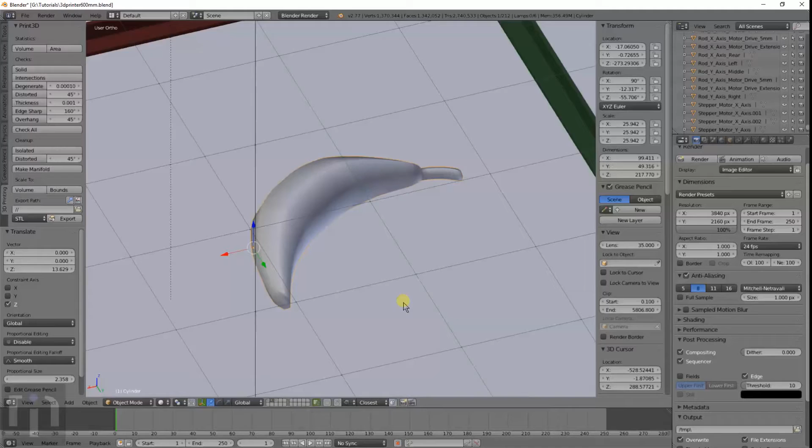Sometimes you just gotta have a banana for scale.

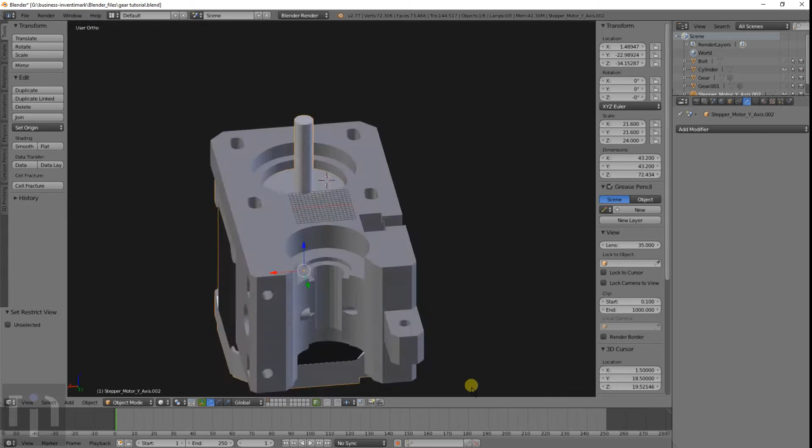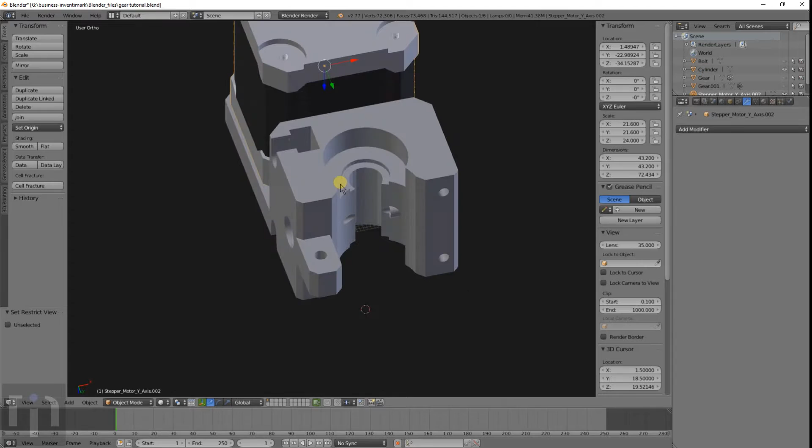Right here I have an extruder that I use. It's the Cyborg extruder. I got it off of Thingiverse. I'll have the link to that in the description of the video. Anyway, this is the one that I use. It works pretty good. The filament goes through here, and it's got a spindle here for the hobbed bolt. I just use a 5/16 bolt that I have, because I couldn't find any metric bolts around here, so I used that, but it works just the same. Anyway, I'll show you how you can make your own custom gears to fit whatever you need, depending on how strong you want the motor to be compared to the output of the filament extrusion. So anyway, let's get started here.

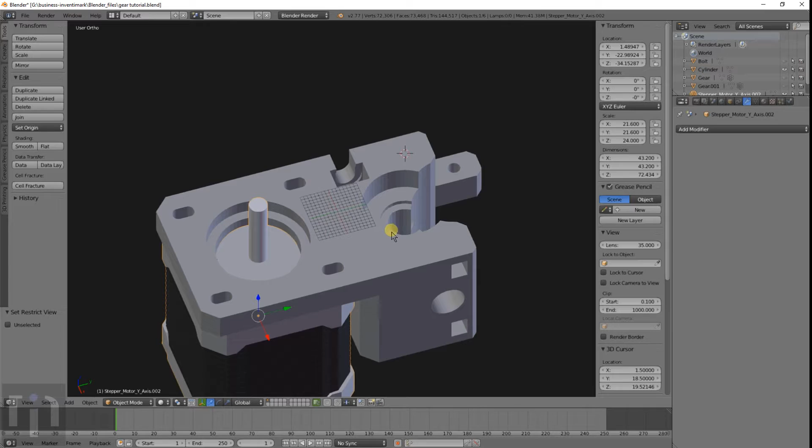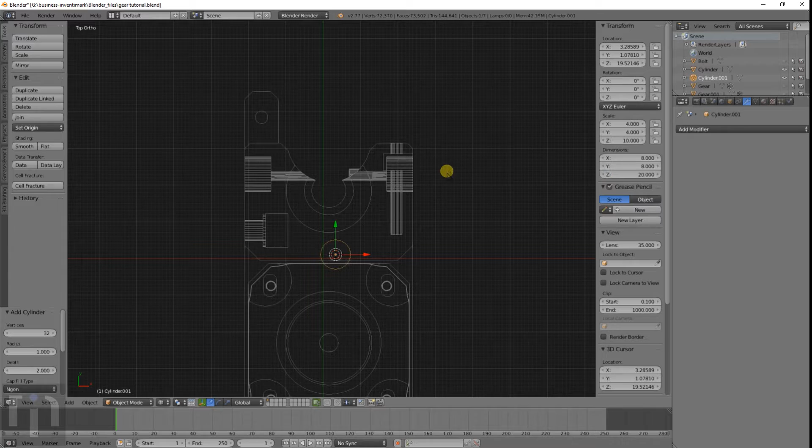So what I like to do is go into top-down view. I already have the motor there, and it's centered on one spot. I already have it centered over there, but I'll need to recenter it here. The first thing I like to do is basically create the bolt that I need. It's going to be 8 by 8. It really doesn't matter how long it is at this point, because we're not really making the bolt, we're just making a simulation of it. So I kind of put it where I think the center is.

Then I duplicate that and just make a bigger one that goes around, that fits up, and you got to kind of match it up to this other thing here. Kind of line that up as best as you can. And get it lined up there, and then you Shift S, cursor to selected, and then select the other one. Selection to cursor, that gets it right in the middle. Turn on my screencast keys, keep forgetting to do that. Okay, so now we have the center point for both of the gears that we want to make.

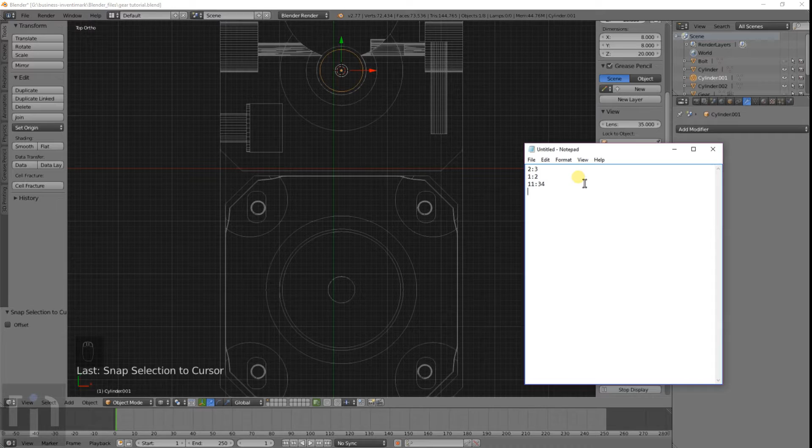And for the gears, what I like to do is pick a ratio that you want the gears to be. You could have it 2 to 3, 1 to 2, 11 to 34, or 4 to 34, whatever you want them to be. And when you have the gears, the best way to do this I found is: whatever your gear ratio that you want it to be, you add the gears together. So let's make this about a 4 to 9 ratio. So we're going to have a 4 to 9 ratio. So one of them is going to turn 4 times, the other one will turn 9 times, so it equals the same. So those added together equal 13.

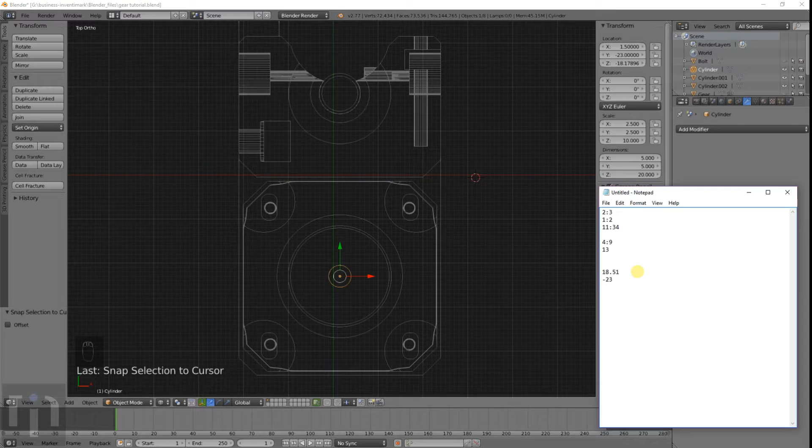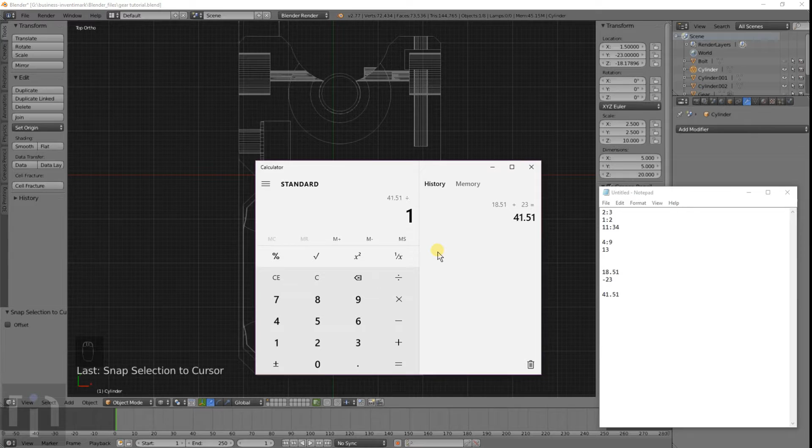So what we need to do is measure this distance from here to here, and whatever that distance is, we can get the information we need from that to make the gears. So here up on top, let's go back - this one is located at... we're on the y-axis, so over here on y we're at 18.51, and this one is located at negative 23. And there we go, negative 23. Let's get the calculator out. 18.51 plus 23 - so the distance between them is 41.51. So to calculate what we need, we divide that by the 13 we got for the ratio. So the distance from here to here divided by the ratio we want, which is 13, equals 3.19. And that's the key number we want to remember to use when we're making this.

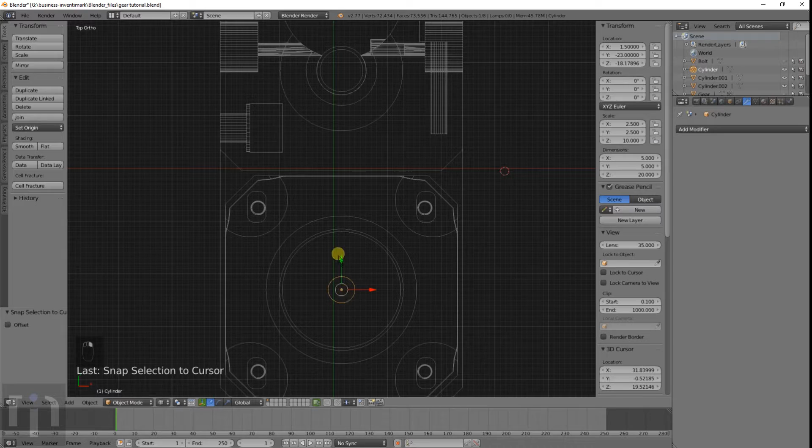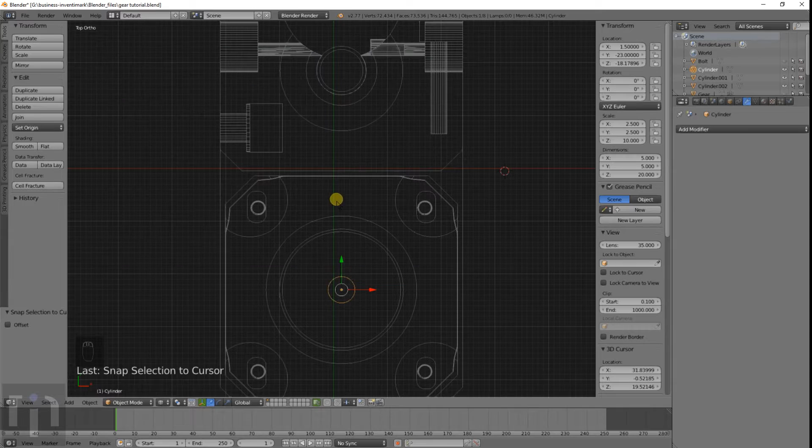So the 4 gear is going to be the smaller one, so that's the one we want to put here. The cursor is selected here. And if you don't have the gear option here, you need to go into Settings, User Preferences, Add Mesh, and there's a couple of different options. The Add Mesh Extra Objects, and Bolt Factory is good too, you can use that. So you add both of those, hit Save Settings, go ahead and close that, and you push Shift A. And you have the option of gears down here, and you go to Gear. Oh, undo that - gotta move the cursor over there first. So, add gear.

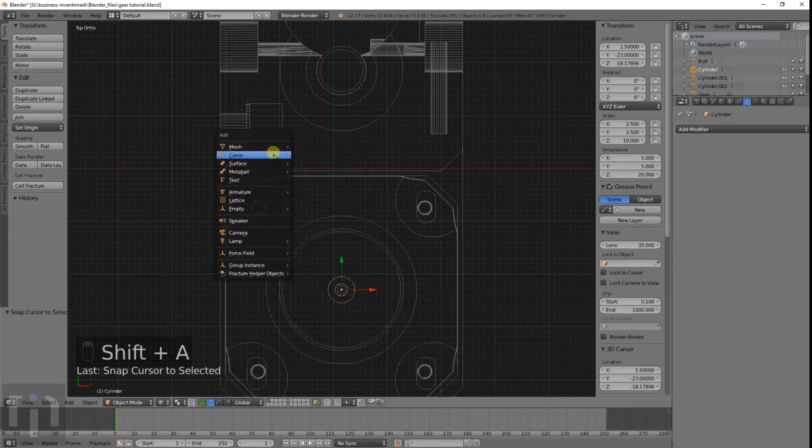And then we have the options box down here for the properties. Number of teeth, we'll look at that in a little bit. But for the radius is what we want.

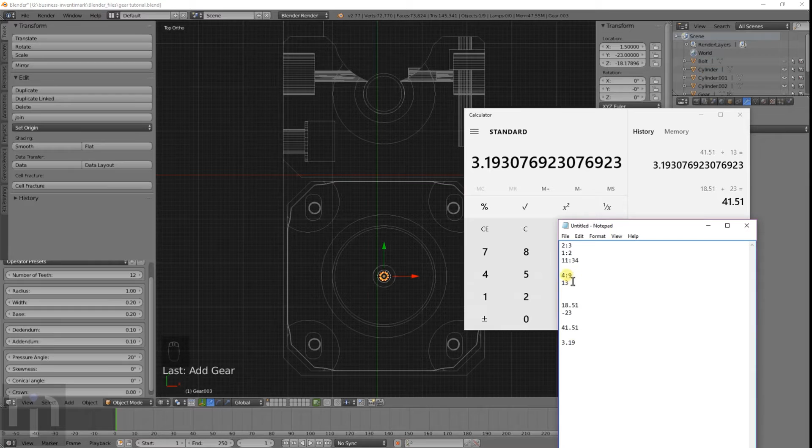So we go back to what we had before. We want to take the 4, multiply it by that 3.19. So we take 4 times 3.19, gives us 12.76. That's going to be the radius of this first gear.

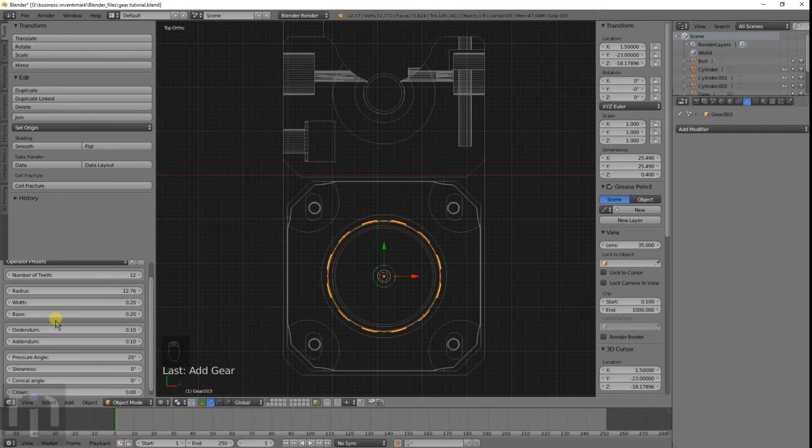And so if you look, well, actually, can't see the gear. It's inside of the motor there. I'll pull it back up when we get this done. But we can see it from here.

And the base is basically just this. Just want to make it smaller than the outside of the gear.

And the dedendum, this is the inside of the gear where the teeth are, how much that goes in. I usually just go to about 1, typically works for most things.

And let's try 1.25. I usually try to get those to match the same always.

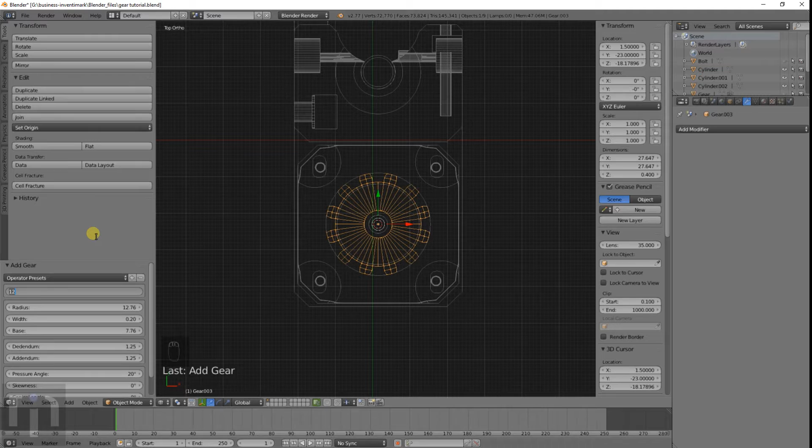And as far as number of teeth go, that all depends on how fine you want to have the teeth. I usually do what looks good. There's no real calculation that I have for that.

Let's see, 20 teeth. If it's that big around, let's try 16. That'd probably be good. So we got 16 teeth there.

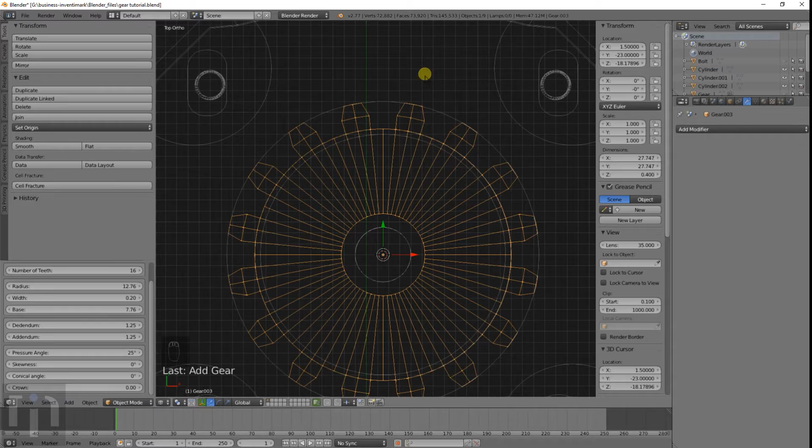And you can actually change the pressure angle and change the outside of the tooth there. But that all depends on what the pitch of the teeth you have, basically.

And so I think we're done with that gear. Oh wait, no we're not. We need to change the width of it.

And usually a good width is probably about 6 millimeters. So that gives you kind of an idea of how big it is. It's 6 millimeters by that big around.

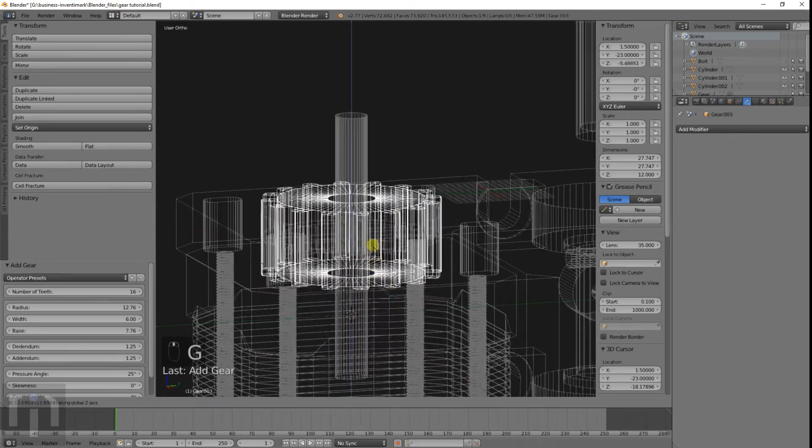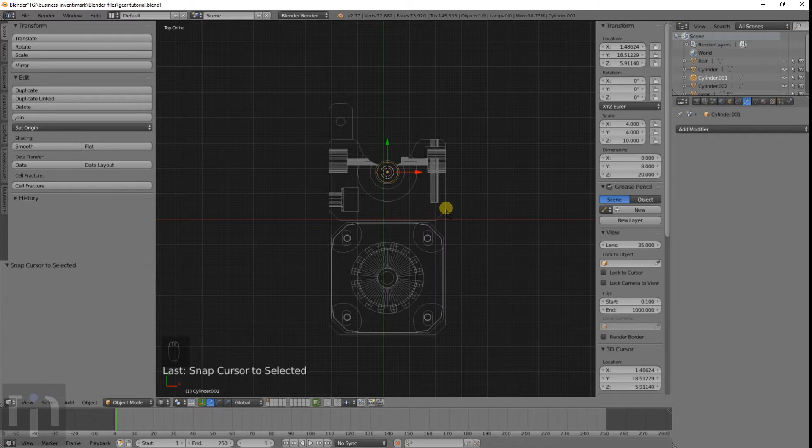Because whenever you move the gear, just like with anything else, it disappears. So let's go ahead and move the cursor to that, and add the other gear.

And so it brings back the same exact size gear that you were just working on. So you can actually use that if you want to change things pretty quick, because it'll keep all the settings that you have here.

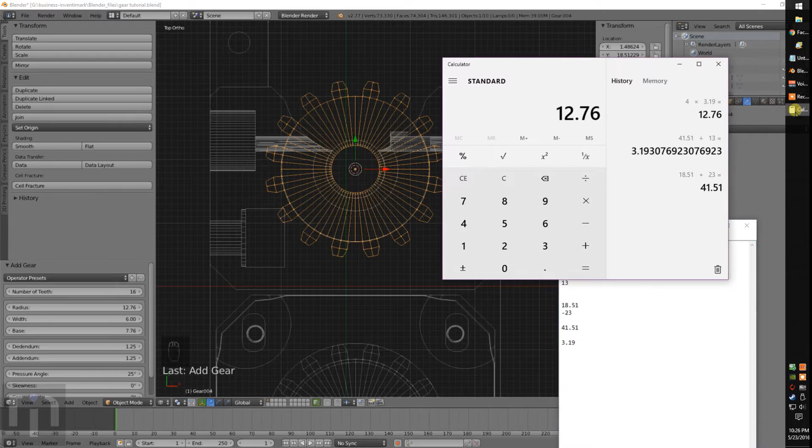And so we got to take 3.19 times 9 is 28.71. So the radius is 28.71. Yeah, that's right.

And so the gear comes out to the right size. But for the number of teeth, we want to kind of have this be a multiple. So 16 divided by 4, that's what this ratio was, would be 4.

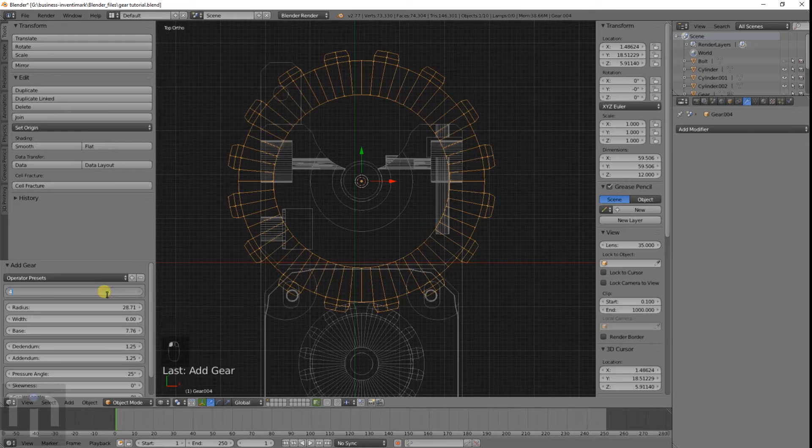So you want to have 4 times 9. So you can actually just do the math in here, which would be 36 teeth. And that makes the teeth line up exactly.

The ratio goes into the same way, so whatever your teeth you have on the first one that you do, the same ratio applies to the other one. So it was basically 4 times 4 is 16, and 4 times 9 is 36. So then we get the correct gear ratio there.

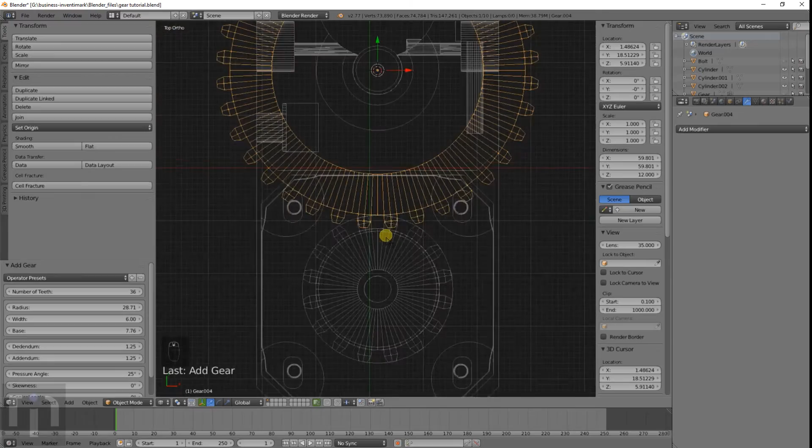I can change the base down a little bit. And so it looks like they line up pretty good here.

And we really don't need to do anything else to the gear. Rotate Z just to double check that they line up good. So it looks like they mesh together well. And the right number of teeth are displaying.

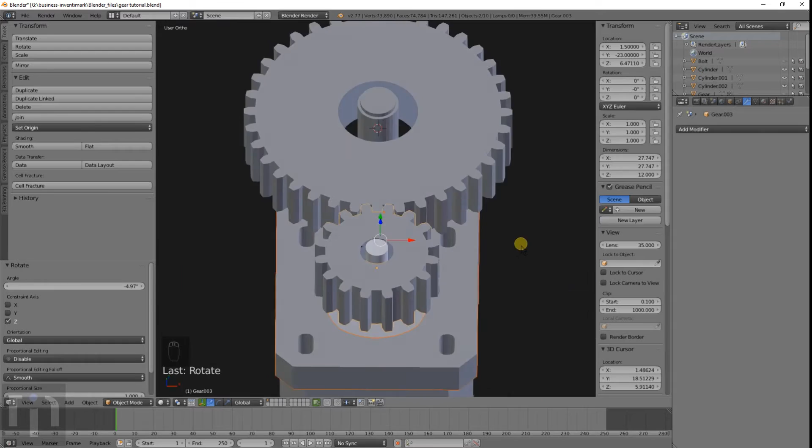That's pretty much all you really need for making the gears. To modify them to work properly, I like to go into edit mode. I'll click around the ring here, which will let me.

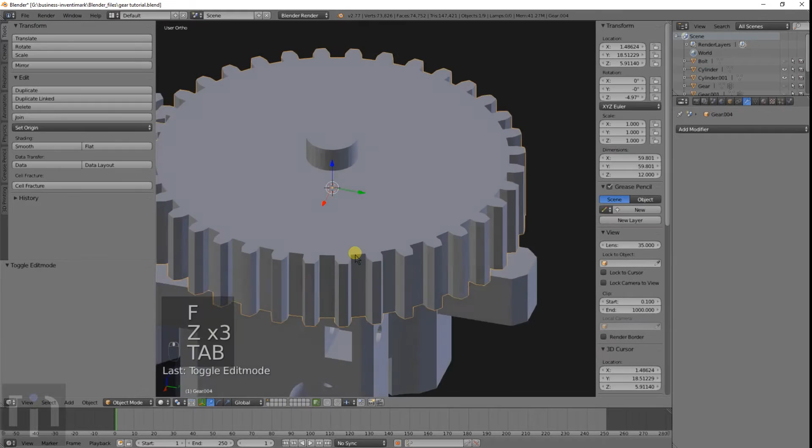There we go. And hit F, and that creates a face on there. So when you go back to that solid mode, it shows it solid there.

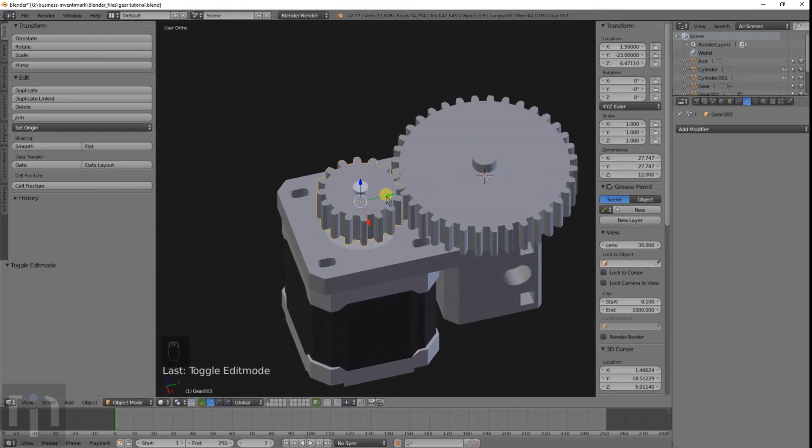So we have 2 solid gears now. So what I like to do is, typically it's a 5mm for most stepper motors that 3D printers use, is the 5mm cylinder. And wrong one, I gotta keep forgetting to move the cursor.

And so I usually do a little bit bigger. And you want to have bigger than the gear.

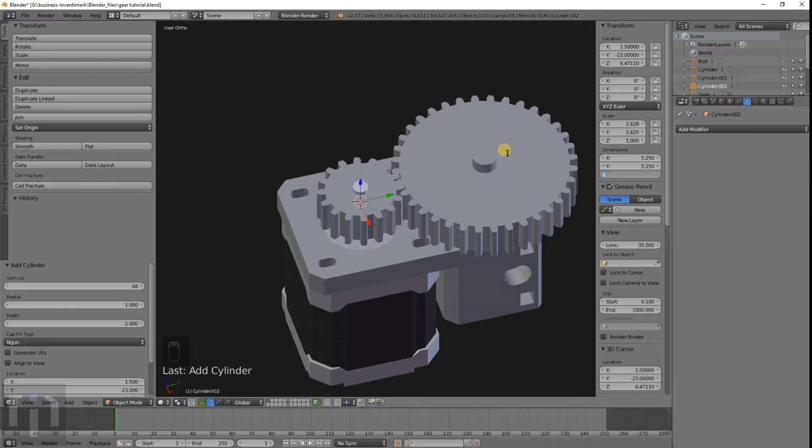Okay, so when I did 6 for the width, I doubled it for some reason. You can actually just change it back to 6. But if you make them skewed or anything like that with the twisted edge, then it completely changes it. Anyway, so that's bigger than that.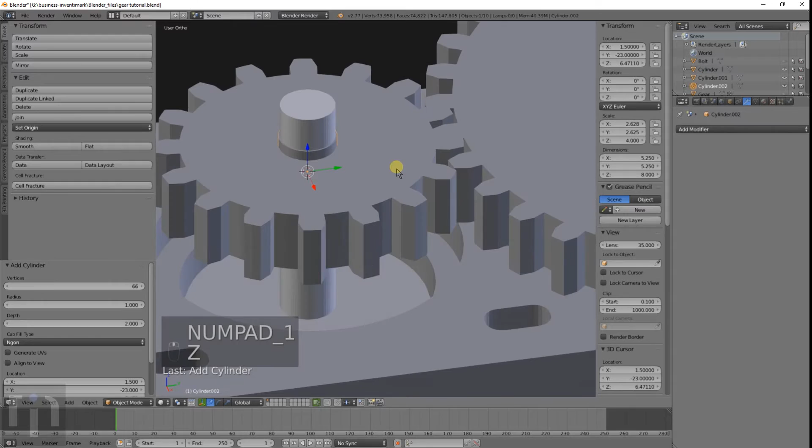And you can do a boolean. Gotta remember what that part was called. Cylinder 2. Make sure it applied. Then you can delete the cylinder.

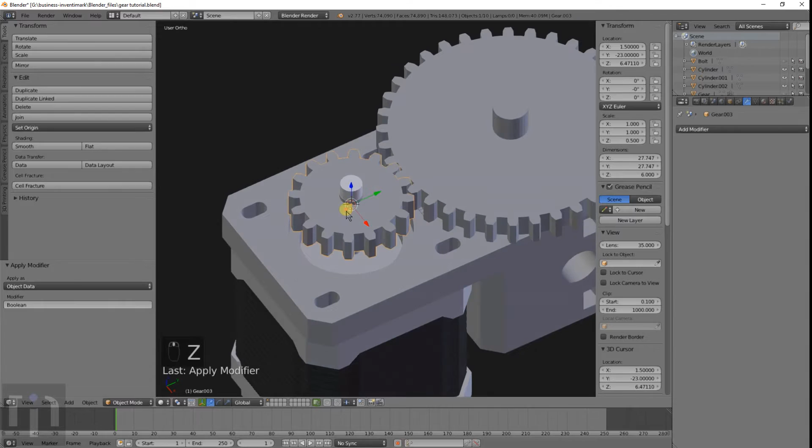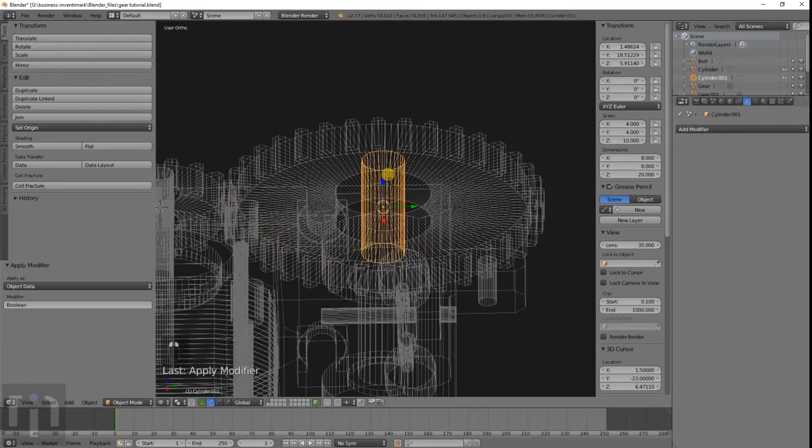And over here, you can actually just use the one that we made previously. That's cylinder 001. Apply. And so there's that.

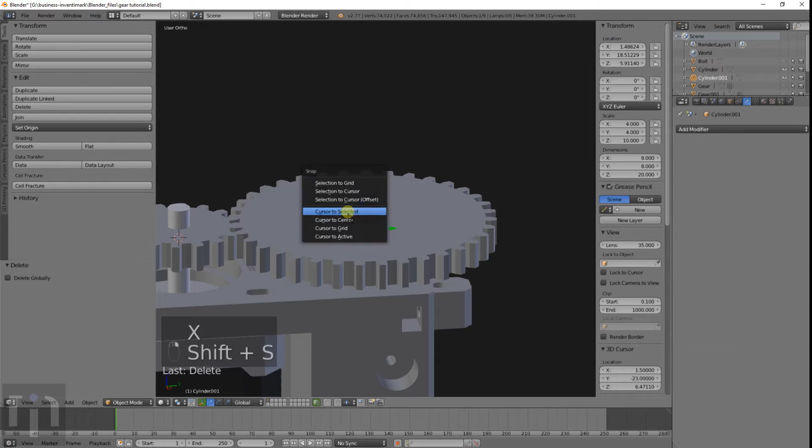And with this, this was a specific... undo that. With this specific extruder, it uses a Hex Bolt Head. And to create that, you just create a cylinder. Actually, move the cursor over here first. Create a cylinder.

And so it creates a small one. You want to make this 13. So you size that up. That's cylinder 2 now.

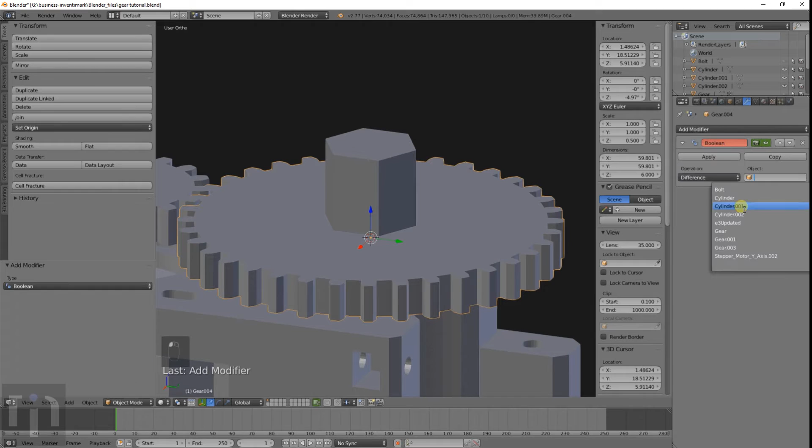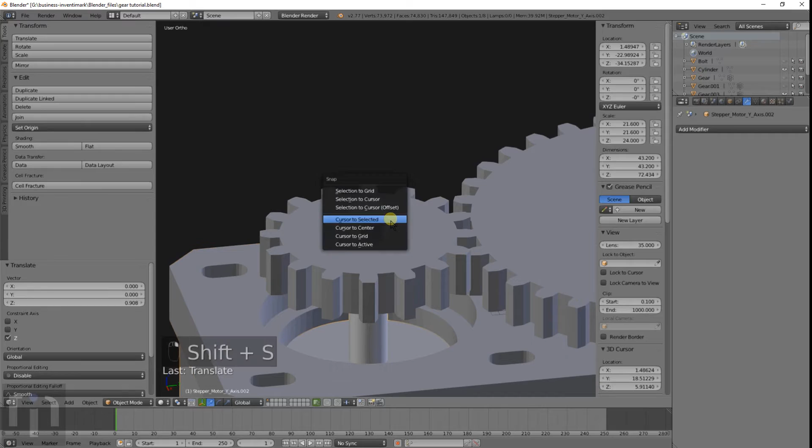So then you have the bolt pattern in there, and it'll hold it just right. And that will basically make the gears. For this one, what you would probably want to do is make something where you can put a screw in there to tighten it down.

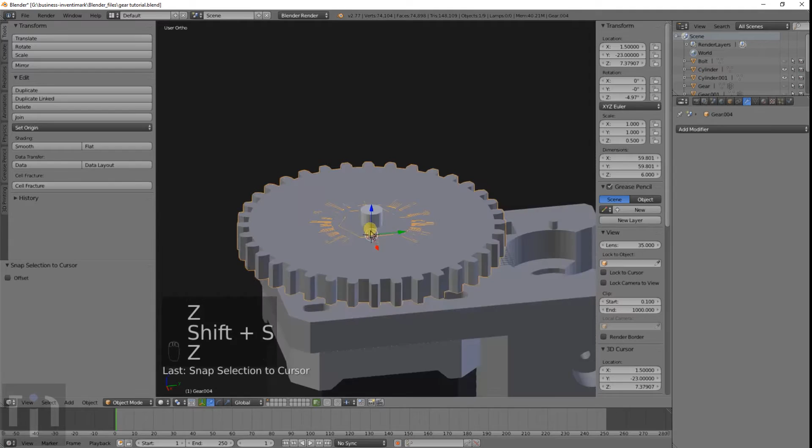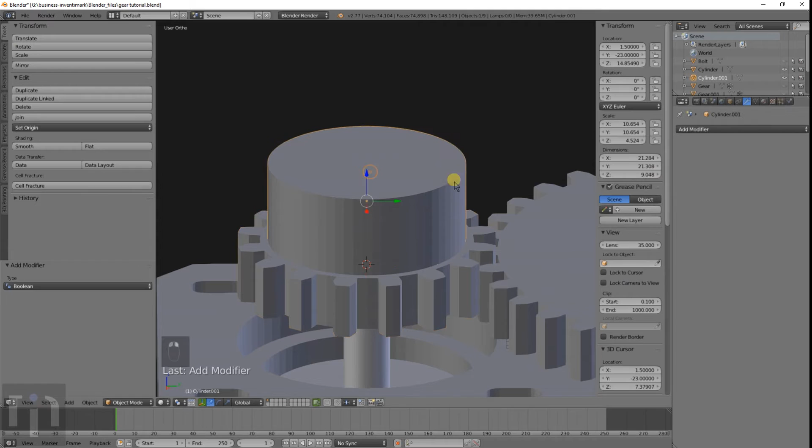Oh, wrong one. Okay, so we got that. You just want to have it smaller than the teeth.

So I got that. And you can actually do the cylinder thing after you get everything done. I'm going to have to do it again because I already did it. And I actually have to make it a different size because sometimes the boolean doesn't work if you do the same exact size. Let's make it a little bit bigger, but we'll do that later.

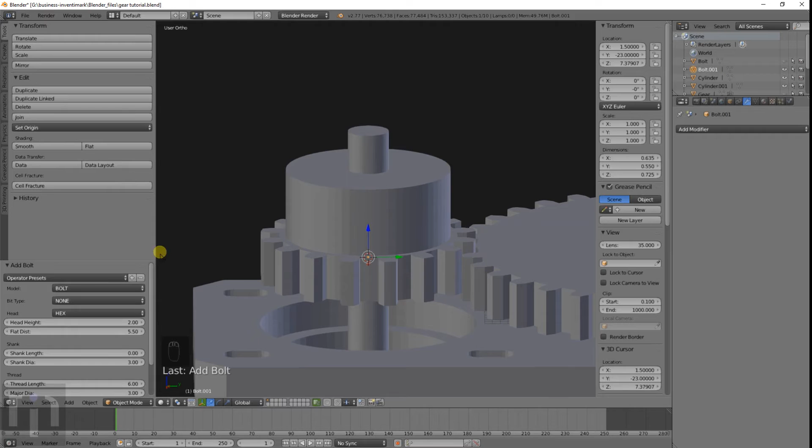And for the bolts, what I like to do is I actually like to just make a bolt. That's what the bolt factory option was. So if you zoom in, it makes them really small. The type that I use is the Allen cap bolts with the preset M3. And it creates the bolt there.

And the only thing we really need to change is the shank length, or actually not the shank length, the thread length. I usually use 10mm whenever I'm doing anything like that. But let's go ahead and make it 20mm just in case, since I don't know exactly the radius of the shape I just made.

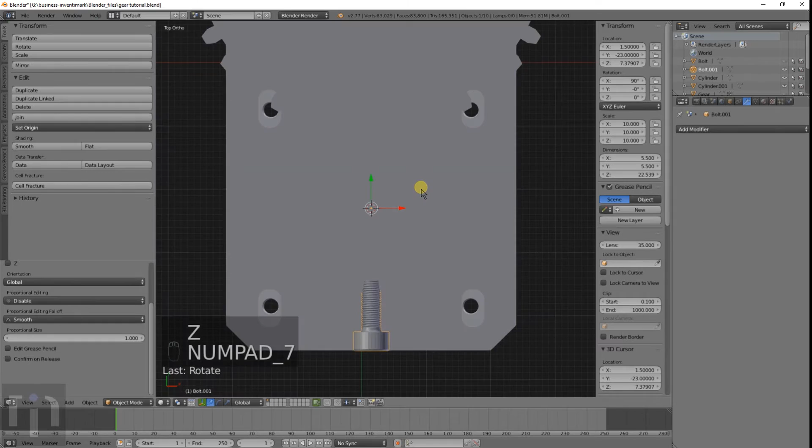And so it's still really small. So after you make the bolt, you just need to multiply it by 10. And it creates it pretty much the right size. And so you can do that.

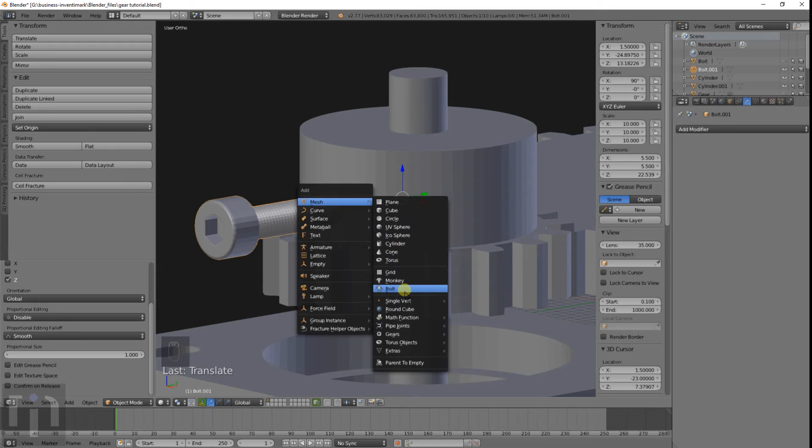Then I like to create another one. This time just go to M3 and then change it to nut. And it's right there. Then enlarge it by 10 again. Rotate it. Oop.

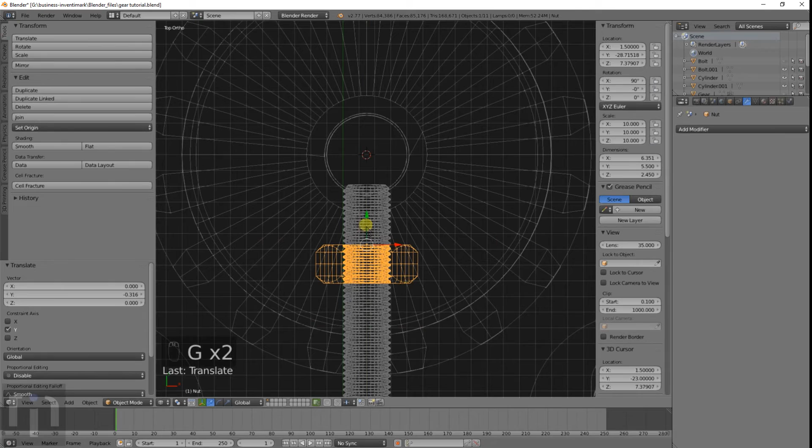And kind of put it where you want it to be. But I had to give enough plastic for the screw to push against both ways, so you kind of want it in the middle. And kind of want to line it up there. I usually rotate it about 30 degrees on the y-axis.

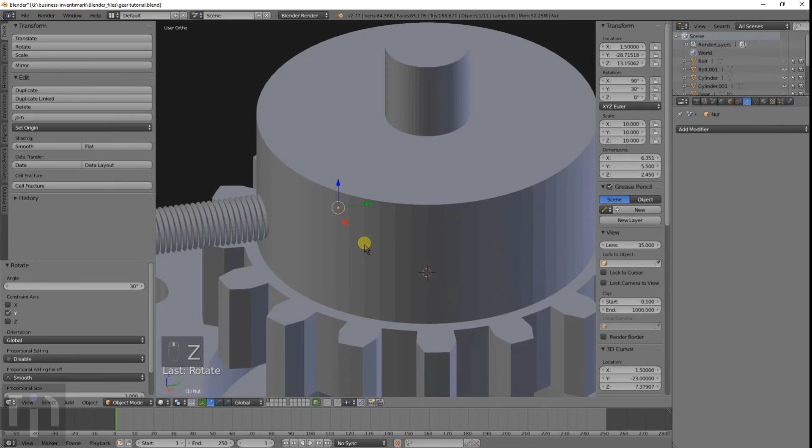So we got that, and then click on there, shift, cursor to selected, shift A, add cylinder, on the hexagon, and then rotate X 90. Then we can kind of size it up just a little bit bigger than the bolt or the nut. And then we can size it this way just a little bit bigger. And so it's basically the right size that we want it.

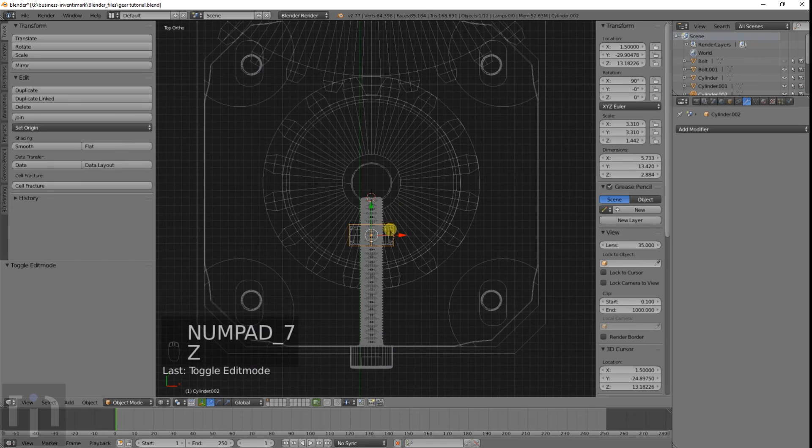Now we can, from the edit mode, grab those top parts, move it up. And so we have that sticking out there. Duplicate that. You can be more precise. If this was centered on here, it'd be better, because then you could do plus and negative on both sides of one line, but I'm just kind of eyeballing it here.

So join those together with Ctrl-J, which joins two objects together. And here I'm going to put another cylinder for the screw hole, as you do, 3.25.

Every printer is different though. Mine prints out 3.25 about just right for the M3 bolts, because it'll leave a little bit of grip left in there.

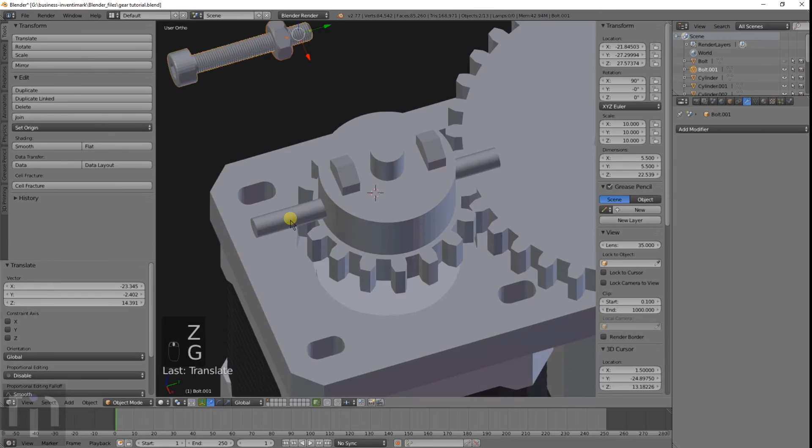So now we have all the objects that we need. We actually don't need these in here at all. These were just for visual reference, because we're not using those. We're using basic simple objects to subtract from this.

So we'll go Boolean difference. This was cylinder 2 for these two that I joined together. And you can see in there, if you look, it's got the cutouts there. Apply. So it's got the bolt cutouts.

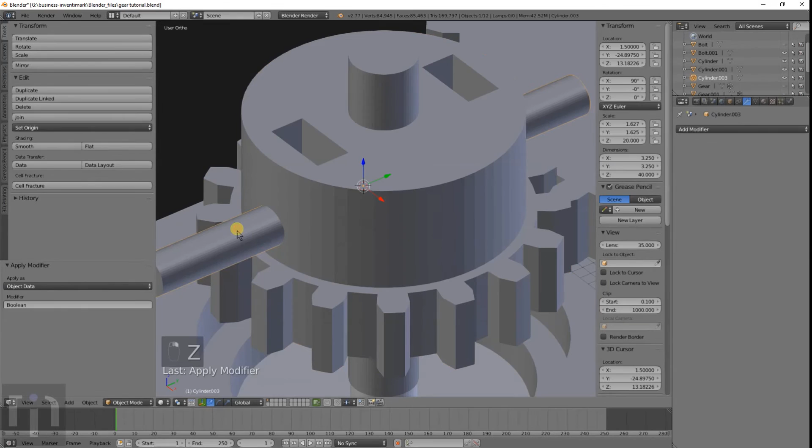This is cylinder 3. And it looks like those are cut out good. Without, with - if you apply it, that looks good. So when you put the nut in there, you put the bolt in there and tighten them down, and it clamps it to the shaft.

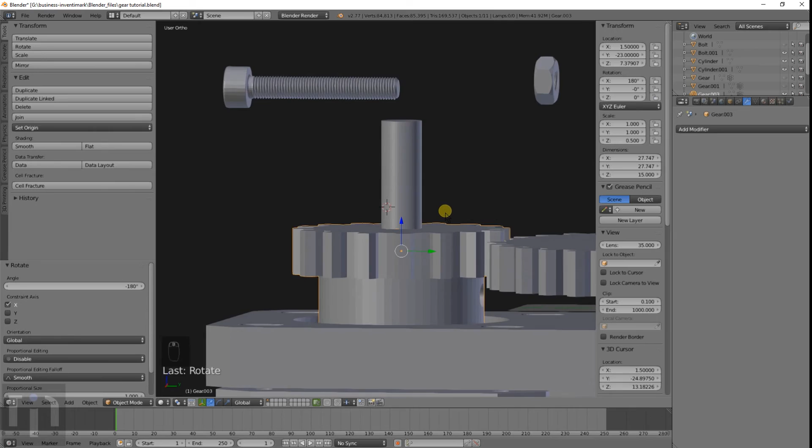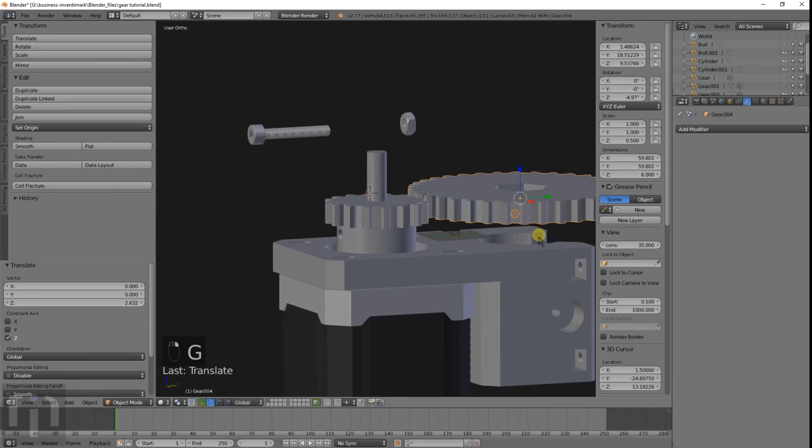And so this motor works kind of like this. So if you can get a bolt that's short enough, it'll actually fit down inside of here. How I use it though, I have it up a little bit so that you can use longer bolts. I just add washers to this with the actual bolt there.

Just to show you, I'll make a... actually, let me do that. Put the cursor here first. Then make a bolt. And this will be an M8.

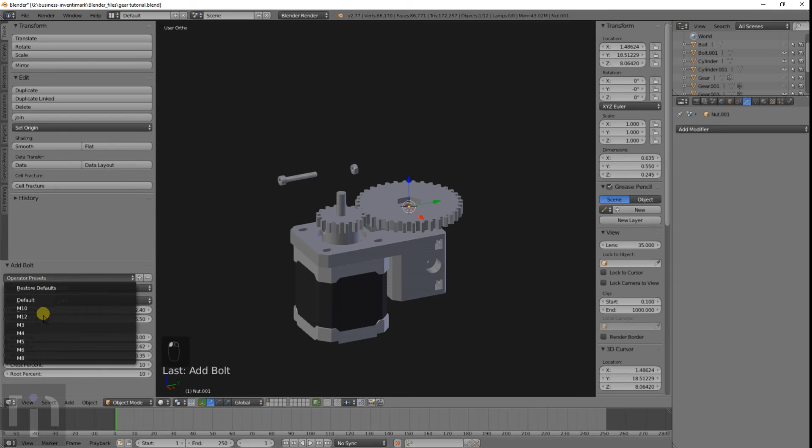And let's actually do the shank length 20. Thread length 20. Actually, let's make the shank 40. And the bolt length, let's do 30.

That looks pretty close to the bolts I'm using. It's not exact, but I don't know what they are exactly. It's something I bought at the store that I thought would work.

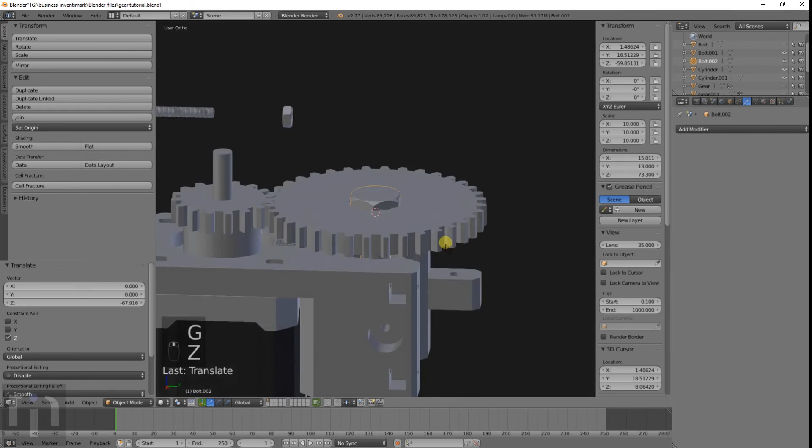And so if you look, it's off by a little bit. So if we rotate by 30 degrees, it'll be right on there. And so it looks like I made that hole almost too precise. You probably would want to make it a little bit larger.

S, Shift Z, because we don't want it to go bigger on the Z axis, just the X and the Y. We'll do that. Okay, so that looks better there.

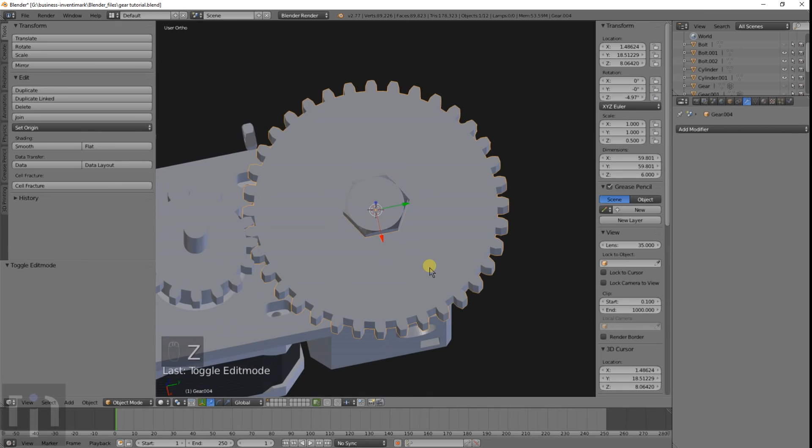But you can make it bigger, and you can make the inside - you can take out whatever parts you want. You might put circles and do all kinds of fancy stuff with the Boolean if you want to take out cones or something like this.

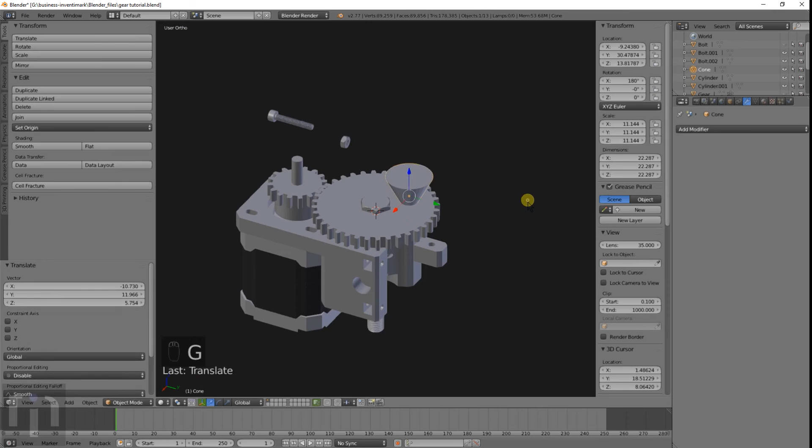Let's go like that. This is just a quick example. You can do whatever you want. Put your logo in there for the gear. Do something else, something different. But...

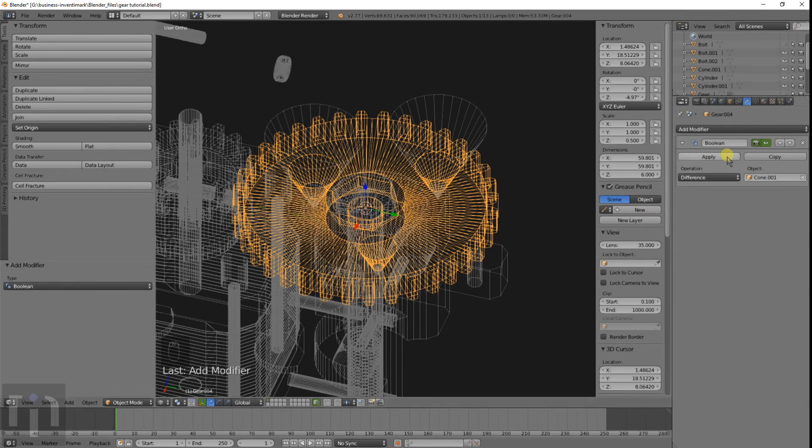You can put whatever you want and just make the inside of the space. Because you really don't want to print - you can print the whole filament full thing, but it's just kind of a waste of filament because you can take out a lot of stuff in there just to save on filament.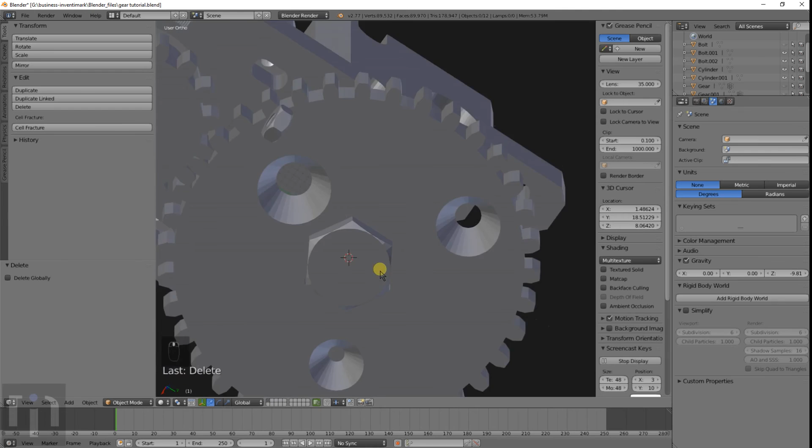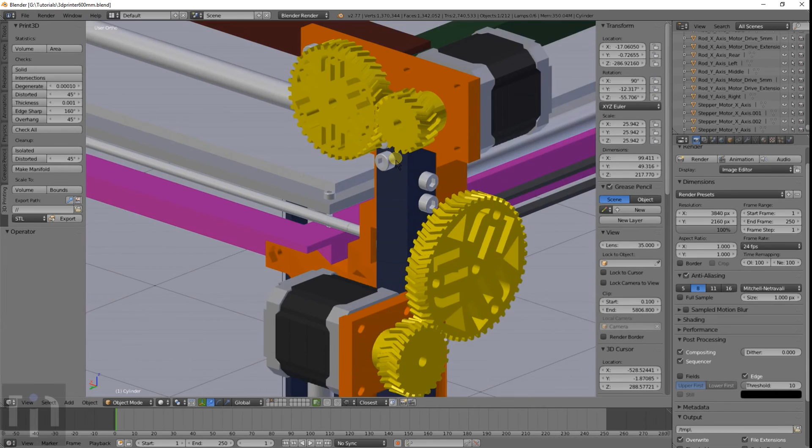But that's the basic idea of the gears, and then you can do the skewed stuff like that. And actually, I think I might have that here. Yeah, my 3D printer I'm working on, I made a 2-to-1 ratio gears with my Inventimark logo inside of them. That one.

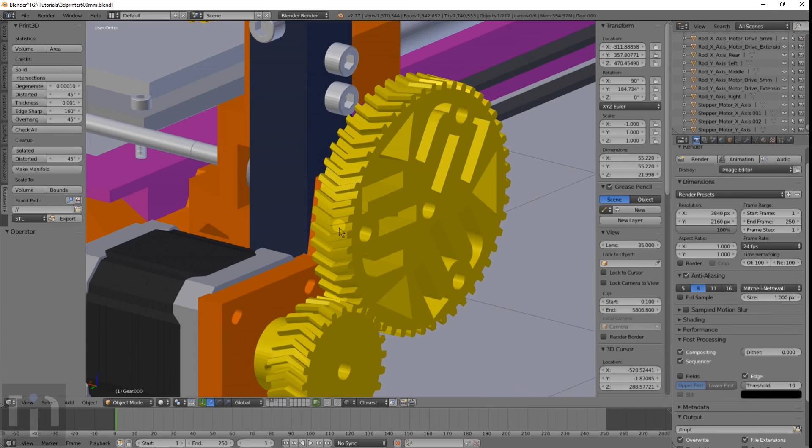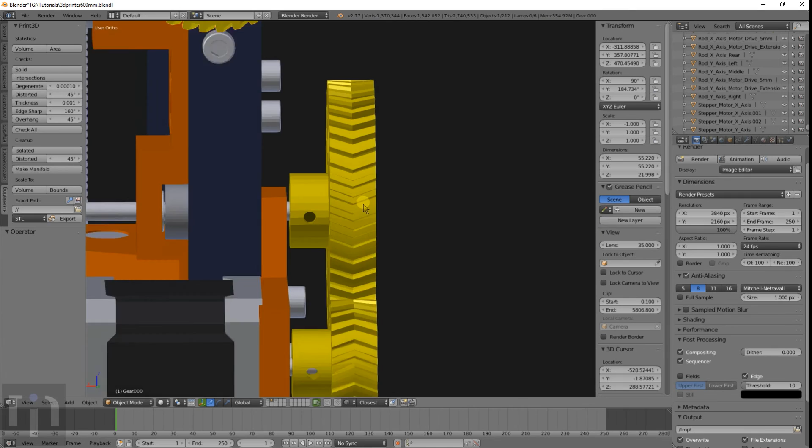This one I kind of just did it that way, but all I did for these is I made the regular gear, made the skewness one way, going the other way, and then you have to kind of line them up with the opposite. Just make one half of the gear and then duplicate it and move it down exactly, mirror it, and then remove the doubles from it, and it'll line up after you join it together, and you basically get the tractor wheel type gear, the chevron type.

That's basically the basics on gears. But these are both, they're all different size gears, but they're both 2-to-1 because this is gonna be my X and Y axis.

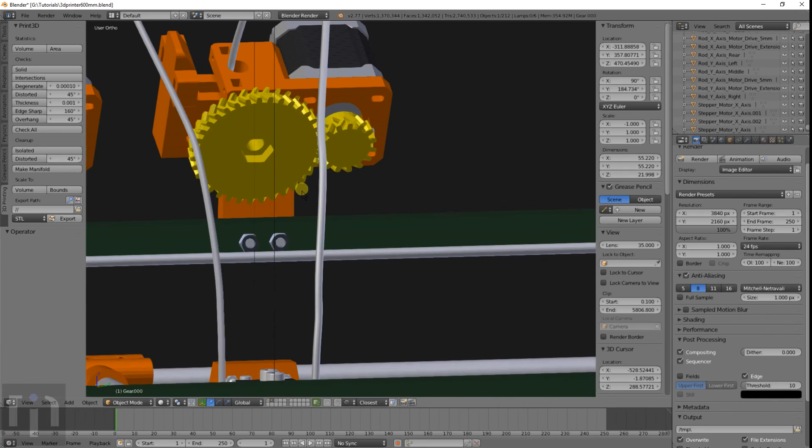And for the extruder, I made a little bit chunkier gears. These ones I haven't really finished yet. I just have the basic design idea down on them.

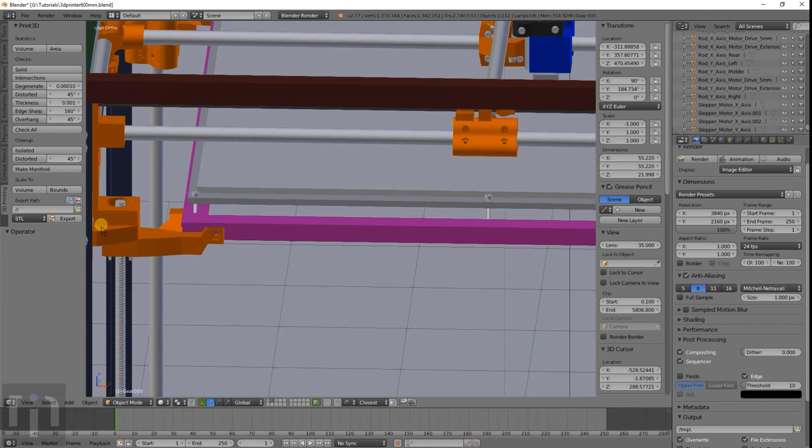But that's what they're gonna look like. It's gonna be a dual extruder. But I have pretty much the entire design finally done. It's not too fancy in some spots, but for the most part, looks like it's gonna work. Oh, that's my banana for scale.